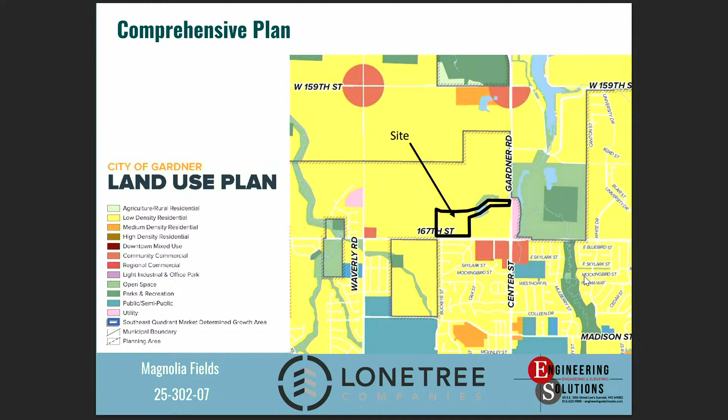The comp plan that you guys currently have is that area is a low-density residential area. But as we look at the zoning map in a second, you'll start to see some of the areas have started to develop in different ways.

So more of a hard commercial corner at the northwest corner of 167 and Gardner, RP3 to the south, RP2 to the southwest. Again, northeast of us is RP3. So it's beginning to develop in a little more of a not high density, but higher density than the low density I think the original comp plan had shown as we continue through that corridor in that area.

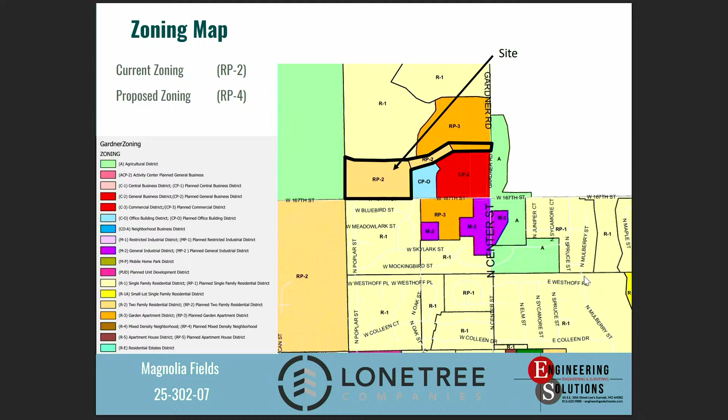So as we started to talk through the options of your code having duplex or duplex compact, and the zoning choices we made, we provided here straight out of your code the zoning districts you have that start to talk about the lot standards, the setbacks, and at the bottom you'll see how we fit and comply. We kind of fit in the middle ground.

So as a duplex standard is typically 5,000 square feet per unit or 10,000 square foot lots, our lots are averaging about 8,200 square feet. The duplex compact then is 6,000 square foot lots, so we're kind of in that mid ground of where it sits, or 3,000 per unit on that side.

The lot sizes then, the minimum lot width, we're going to sit to the standard of 70 foot, which is your duplex standard versus the duplex compact. And as you go on the building coverage, we're kind of in the middle. The front setbacks, the side setbacks, we're generally in compliance with the duplex on the side setbacks. And as far as building height goes, we'd stay in that same height standard that meets your duplex zoning code.

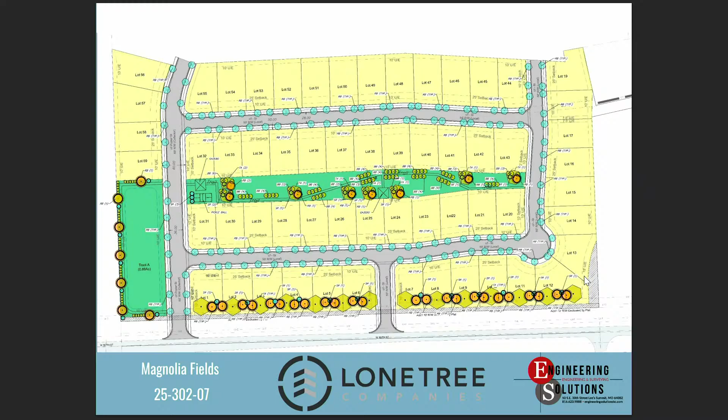There are a number of deviations that we're going through and asking for on the side of it. We'll go through each of these. So there's a lot of verbiage in there, and I think in the presentation or the submittal you guys have, you should have the list and the reasonings for it. If you go to the next page, it shows that breakdown of deviations.

So one of the deviations, deviation 1, is the driveway width. The driveway width in your code doesn't allow, or it's a tighter driveway width, I guess, than what might normally be standard.

As we started to look at what a duplex would want with a 2-car garage, 16 foot wide, a standard driveway that we could fit in there would be 20 feet wide, so we could park 2 cars on that side of it. Deviation 2 then starts to talk about the hardscape out in the front of it.

So again, the surface area as it relates to that, driveways are a little bit larger, but as you start to see, there's still a sufficient amount of green space out in the front of each one of these spaces, as well as the green space around the building.

Deviation 3 then starts to talk about the amount of garage doors that can be visible from the frontage side of it. So you'll again see that we've highlighted the 16-foot garage doors.

Deviation 4 then starts to talk about your code requires a sidewalk that would go from the building directly to the street. Our proposal is to have that sidewalk, or the porch exits, go onto the driveways so that we don't have additional hardscape out in front of the buildings.

Deviation 5 then starts to talk about that entryway, and as we're starting to show here, just giving an enhanced entry feature. As the plans continue to come forward, we'll continue to develop that. But as part of our request, we're providing additional architectural elements and pieces in there as part of that deviation.

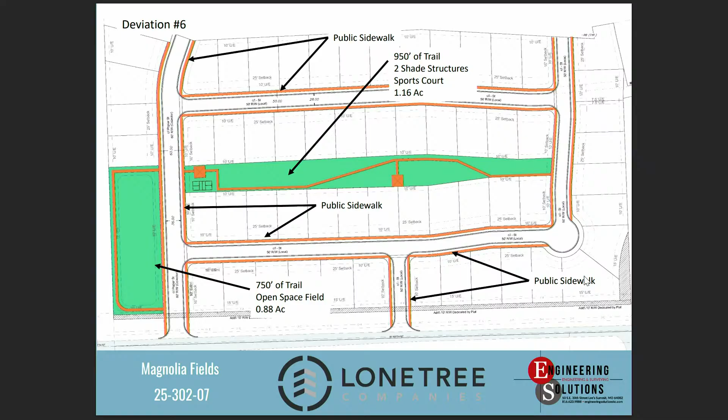With that, we're here for any questions you have.

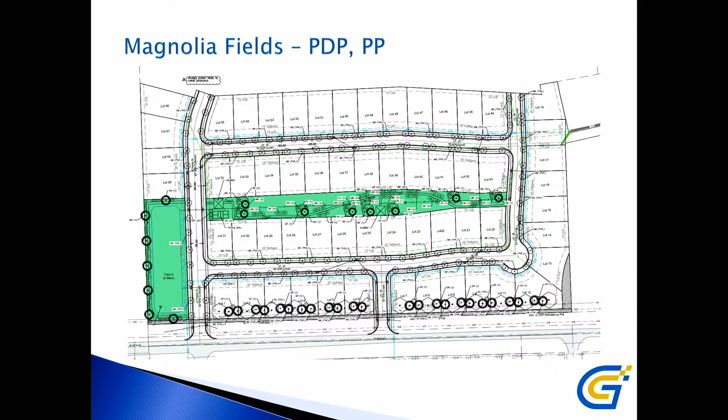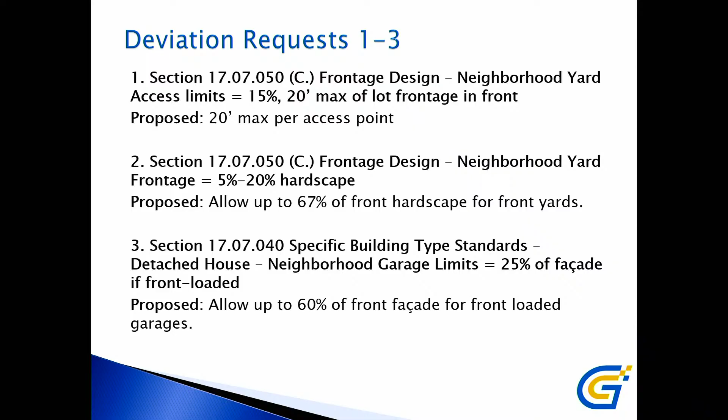The plans are in general compliance with the code, with the exception of the 6 requested deviations. I won't go over these in detail since Matt already mentioned them. Regarding the building deviations, typically we get those with the final, but the applicant requested them at the preliminary stage and provided justification for what they would be doing to the building permits and the features they would add. So staff is comfortable with granting them at this stage.

Staff finds that with the proposed conditions, the plan reflects generally accepted sound planning and design principles. It provides access for adjacent properties, does not deter any existing or future development on adjacent lots, and achieves the code intent to minimize the number of lots, and is consistent with various policies in the comprehensive plan to support future growth.

Staff recommends approval of this development, and there are 2 motions needed for this item. The first is for the rezoning and preliminary development plan. As a reminder, the Planning Commission makes a recommendation to the governing body for these 2. Staff recommends approval with 3 conditions: first, to ensure the site meets stormwater requirements; second, to ensure the existing sewer meets city requirements; and third, so the building elevations comply with the deviation requests.

The second motion is for the preliminary plat, which the Planning Commission is the decision-making body for. Staff recommends approval of that with 1 condition. I'm available for any questions.

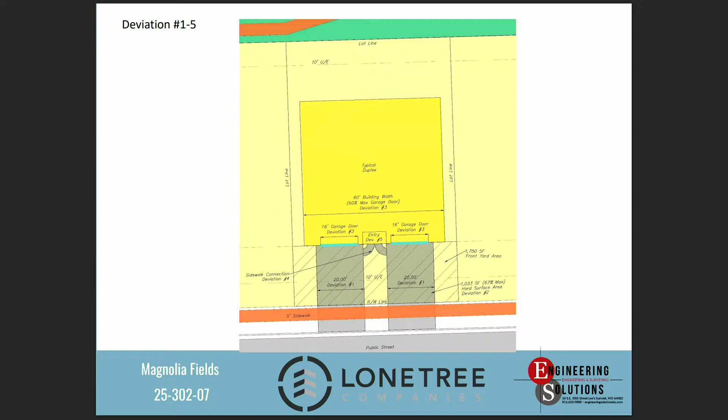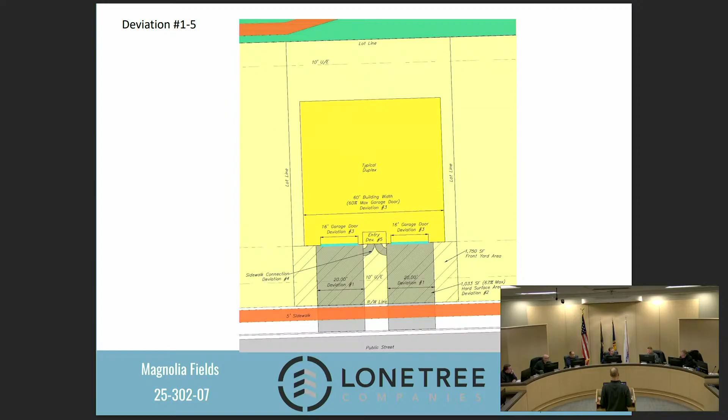No, I do have maybe just a point of clarification. So I saw the two entrances, very clear on that. The narrow corridor section, could you talk a little bit about what's going to happen with that?

Yeah, so to the neighbor's point, the access point will be off 167th only. There is a half right of way that appears it would have been a half right of way that goes east out to Gardner Road. Yes, our intention on the preliminary plat is we're creating a tract for that piece of ground. And to whomever purchases, develops, or does anything to the east and south or east and north, that ground would be available to sell to them or give to them, however it would be.

We have no intentions to do anything with that ground other than clean up whatever this odd shape was that got created. So just so I'm clear, eventually at the point of sale, that narrow corridor will be purchased, is what you're saying. And yeah, we're going to create it into a tract, so it becomes a pretty useless piece to us, and it could likely be useless to anybody else, but it only makes sense for whomever is developing south or north of there.

Right, so I don't want to give away the developer's position on it, but I think that there's not much value in it for them either. I think it'd be a preference to find whomever wants to develop and take that over, to do something with it more appropriately than keep a 12-foot sliver.

And so you just answered my other question. The final one is just, I know this is the third time, but it's not your intent to keep and maintain that. Obviously it is to sell it once. Right, the intent would be for it to go away. Okay, yeah, no other questions. Thanks.

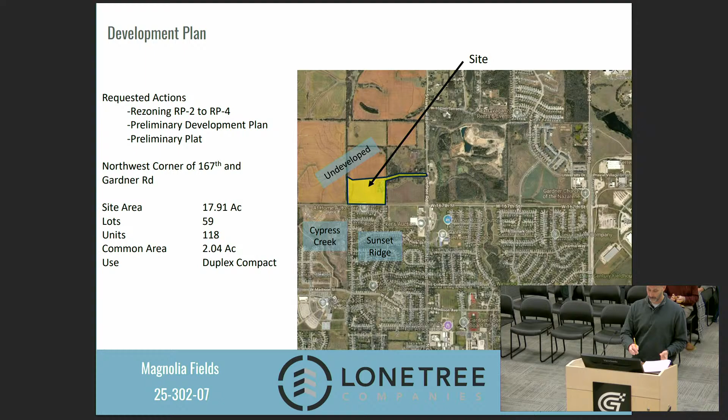I have no questions at this time. Can we go to the landscaping plan? I know that's typically like a final development thing, right? I've heard pickleball courts can be noisy in neighborhoods. I guess what kind of fencing or shrubbery, or do we need to look at adding? Did you look at that? So there's some lots that are pretty close there.

Yeah, so I think we are keeping the description. I know we call it pickleball court, and that likely could be it, or it could be a sports court that could be convertible into a couple different uses on that side of it. But yes, we are also hearing as time goes on that we'll continue to evaluate whether that's the right court type for that location. Some type of an activity court will be there, in our opinion.

But yeah, if the pickleball is there, the things we have used is they have some low netting that can go on the fences that will help keep some of the sound down. It won't end all of it. Additional landscaping on that residential side will help do some of it too. But yeah, we're going to evaluate the final decision on that one of what it'll be.

But something, yeah, I agree with you. We're hearing more and more as developments keep going on, everybody loves pickleball, but nobody wants it in their backyard for sure. Yeah, that's what my comments were going to be, I guess. Yes, for the final look, maybe some more landscaping there. Yeah, I appreciate that, along those lots there.

Another question I had was regarding the power. I guess two questions. First, the hatched area kind of along the south and southeast corner, is that the additional 10-foot of dedicated right-of-way? Yeah, correct. So the hatch on the south side is the additional 10-foot of right-of-way that we're providing to the city for the future redevelopment or development of 167th. And then on the east side, that kind of little shaped thing is the future access point that will go onto the property to the east whenever and however that ends up developing, giving an option there.

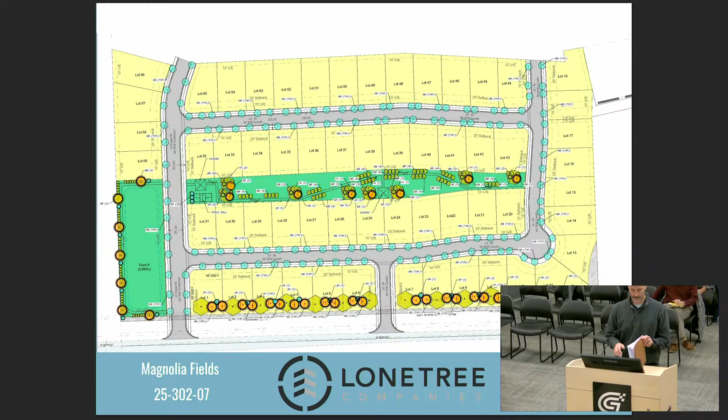Good to you. Yes. I have a staff question, and I'm sorry, I know we talk about this, it seems like every time.

Preliminary versus final plat - we approve both of those, not recommend, in terms of the motion we may make? That's correct, you approve both the preliminary and the final plats. The dedication of right-of-way and easements on final plat is accepted by council, so they're not acting on the plat itself, they're accepting the right-of-way and easements. All right, thank you.

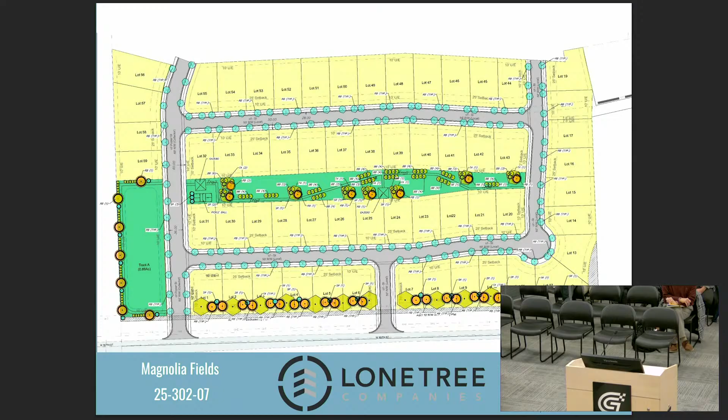Would you mind changing the slides to the suggested motion slides? Sounds like. I'll make a motion.

The Planning Commission recommends approval of the rezoning and associated preliminary development plan to rezone 17.9 acres from RP2 Plan 2-Family Residential District to RP4 Plan Mixed Density Residential District, with the deviations as outlined in the staff report, subject to the following conditions, items listed 1 through 3.

Second. We have a motion by Commissioner Combs and a second by Commissioner Berger. All those in favor? Aye. Opposed? Abstentions? Motion carries 7-0.

I'll make a motion for the preliminary plat. Planning Commission approves the preliminary plat, subject to the following condition, item number 1 as listed in the staff report. Second. Another motion by Commissioner Combs and second by Commissioner Berg.

All those in favor? Aye. Opposed? Abstentions? Motion carries 7-0.

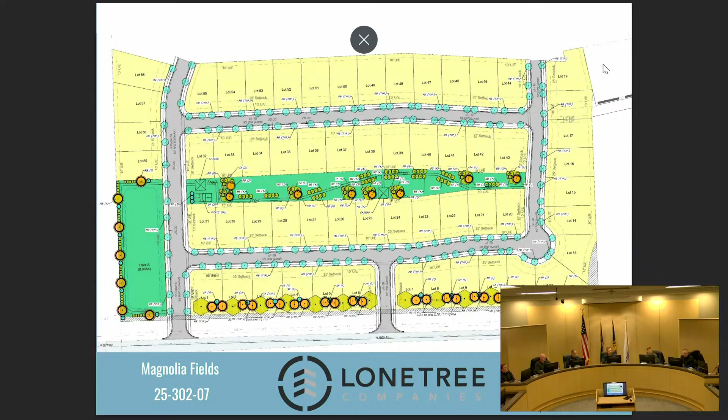This item will be considered by council, the rezoning preliminary development plan, February 16th. That's our next meeting, is the 16th. Thank you, Maggie.

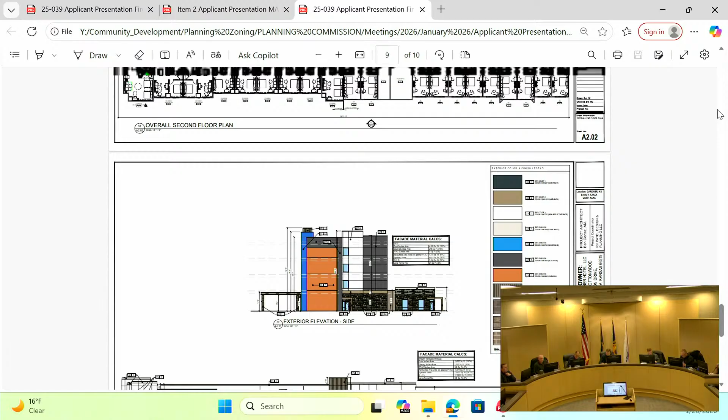Moving to regular agenda item number 3, New Trails North third plat, rezoning from C3 to CP3, preliminary development plan and final development plan, and this is also a public hearing item. Is the applicant present tonight?

Thank you, Chairman, members of the commission. Jeff Skidmore with Schlagel and Associates, 14920 West 107th Street, Lenexa, Kansas, here on behalf of the owner developers this evening and making the application for this next piece.

This is the New Trails Development Commercial Center at the southeast corner of 175th and I-35, essentially the exit ramps there. There's one piece already in place, the convenience store, the Phillips 66 store that's there and functioning now. We brought that to you a couple years ago and are pleased to bring this next piece - a 128 unit hotel, co-branded hotel unit on about a 3-acre tract of land, roughly centrally located within the development. It does not front on 175th Street.

It actually fronts on what is New Trails Circle, which is a private drive that was developed as part of the original infrastructure out there to establish the grounds and get things moving. The proposed hotel has access off of that New Trails Circle, one to the north and one somewhat to the southwest corner, near the intersection of New Trails Parkway and New Trails Circle. I'm trying to keep my street straight there - it's not always easy.

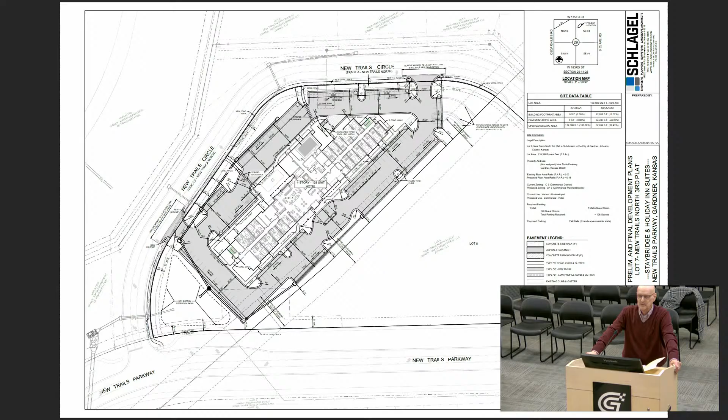We do have one small deviation we're requesting as part of this approval. The code requires 8 feet of space between the back of the curb and the building, typically wanting it to be concrete or a concrete sidewalk through there. What we're proposing is to put a 5-foot sidewalk at the back of the curb and then have 3 feet of landscaping between, so we're still providing the 8 feet required, while the landscaping hopefully softens the aesthetics up against the building and gives a little more presentation of our building from the parking lot itself.

Other than that, I just want to extend my thanks to staff. They've been great to work with to get us to this point. We greatly appreciate all their work and assistance they've provided for us. Other than that, I'd be happy to answer any questions. We are in agreement with the staff stipulations and the staff report, and happy to answer any questions anybody has.

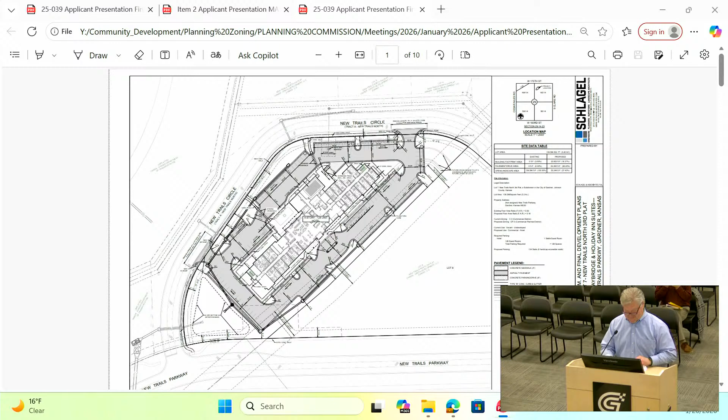Again, this is item 3, rezoning, preliminary and final development plan for a dual brand hotel. As the aerial depicts, the application before you today is for those 3 applications, specifically for the new 4-story, 128-room dual brand hotel. The property is approximately 3.2 acres and is part of the New Trails North commercial development. The hotel was part of the original rezoning plan that went before you and the council, adopted back in 2020.

To the north is vacant commercial ground and a convenience store. To the east and south is vacant commercial, adjacent to the Southern Star natural gas pipeline. This development will need an encroachment agreement for their south parking lot and possible cross access with the land to the south, which will be a condition of approval. And of course, to the west is I-35.

The dual brand hotel chains that make up these applications are Staybridge and Holiday Inn Suites. The proposed hotel totals approximately 23,000 square feet and will consist of 128 rooms. The landscape plan shows the minimum required landscape plant materials to be installed on the site per the land development code.

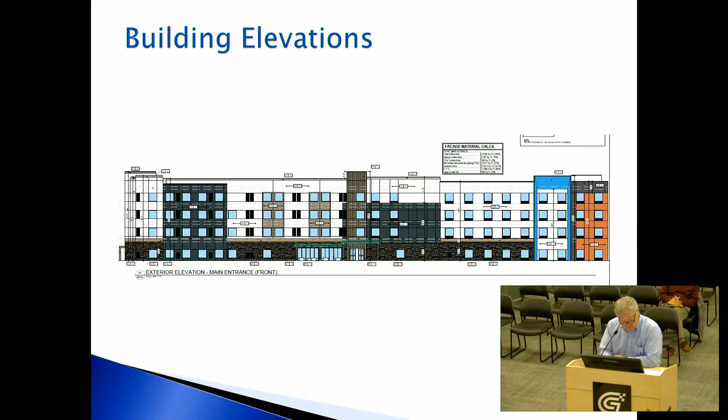As you can see from the elevations, the developer has broken up the long walls with offsets and different materials and colors. The main construction materials along all facades are color EIFS, stone, and brick.

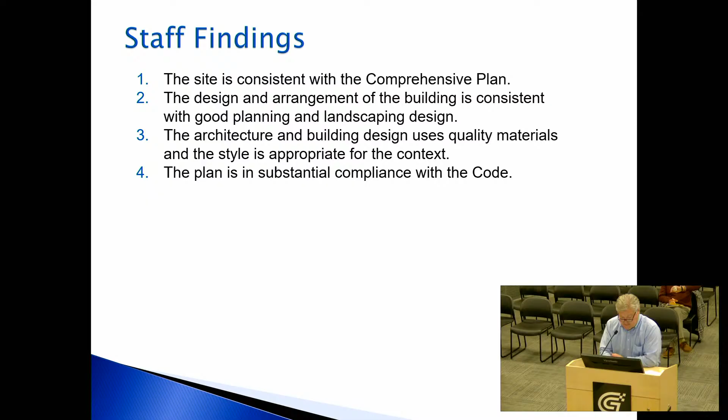Staff finds that this property is consistent with the character of the area, and the proposed plan is in line with other recent developments in the I-35 and 175th Street sub-area plan. The architecture and building design, along with the overall final development plan, are in substantial compliance with the code. As mentioned earlier, they do have one deviation request, which was described in great detail. That concludes the staff recommendation. If you guys have any questions, I'm available.

Wait till the public hearing, I think. Oh, yes. Had it and closed it already. Yeah, I know that was like 2 months ago. I remember there was a gentleman here. Let's see, yeah, he's not present tonight.

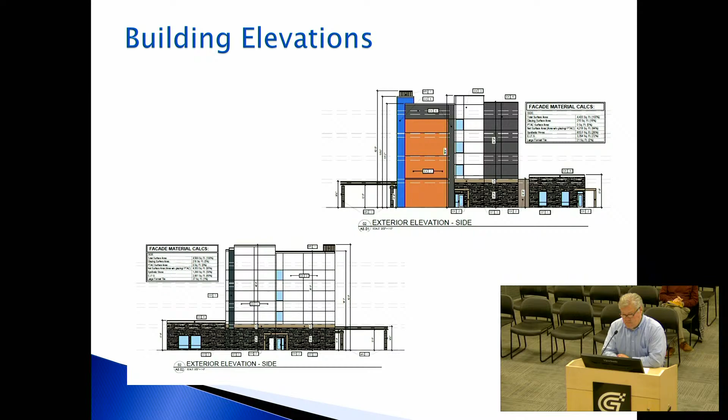Do you have any pictures, let's say if you're driving on 175th and you look to the side, I'm just wondering what you're going to see. You're going to see the hotel facing this way, because everybody complains about aesthetics—you're driving and then you see that hotel there. I'm just wondering, from your perspective driving on 175th, how you're going to see it, because you see this, but you can't tell how.

Let me go back to the aerial real quick. You'll be able to see more of it from the off-ramp and on-ramps to I-35, as you can see from the aerial. From 175th, you're going to see the side a little—you'll see that north side I was talking about earlier, but you also have to realize there will be probably 4 other commercial uses out in front of this that are closer to 175th Street than just the hotel.

We really worked on them quite a bit with the landscaping to, one, screen the parking, and two, screen the mechanics, to give a little bit more character from the public realm. So forgetting about the 4 lots in front there, you're not going to see it from 175th, but from the ramp you're going to see the hotel, and the entrance will look like this from here.

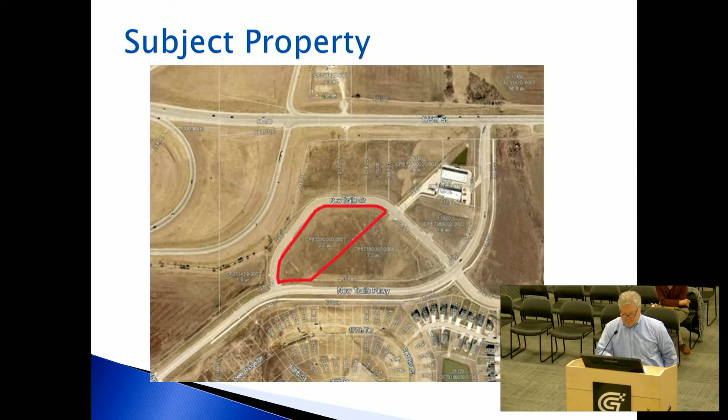Am I interpreting the design correctly? The entrance is on the east side, facing east, so it'll be kind of blocked from view. I think that'd be a good question for the applicant's engineer. Maybe he can speak to that.

That was one of my questions too. It seems backwards from what I've thought. That's why maybe I confused you, because I was curious how it's going to look. We were a little confused as well, but I think they're wanting that front view from New Trails Parkway, which is going to be a major road through both sides.

This may be a silly question, but just for confirmation on the landscape with the 5-foot sidewalk versus the 8. The 3-foot buffer we're talking about, that's in between the building and the sidewalk, correct? That is correct.

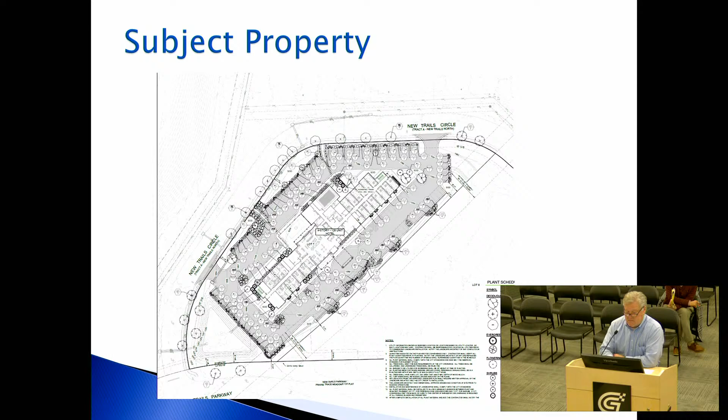Is that consistent around the whole building, or just the spot where the landscape is designated here up against the building, on that east side? They don't have any parking along the west side of the structure, but they still have the drive lanes, so it looks like a lot of the parking will be facing out towards the New Trails circle on the west side.

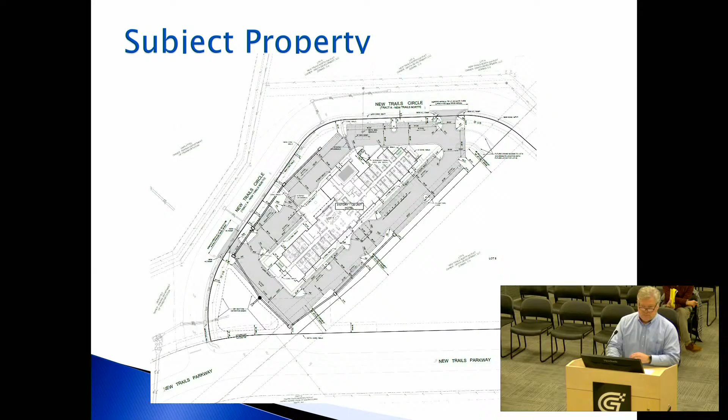Has staff or the applicant had any conversations with Southern Star about that encroachment agreement? It seems like putting in a storm sewer less than 10 feet away from the center easement might be a little concerning. We have had conversations with them. We've got a draft agreement in place. They typically want our final construction documents before they make that final agreement. We've worked with them before, with the convenience store as well.

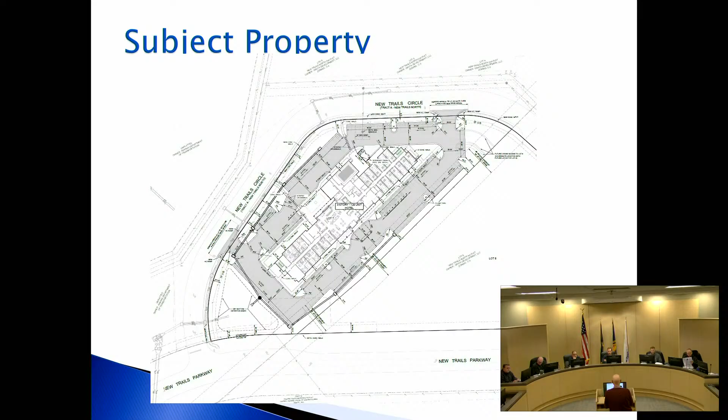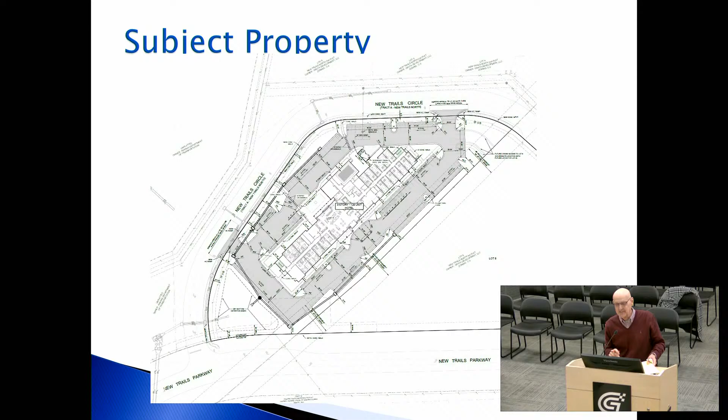So those are in place. And again, the finals will be part of our building permit package that we submit to the city as a condition of our permit approval. So yes, we have initiated those conversations with them. That makes sense.

Any other questions from the commission?

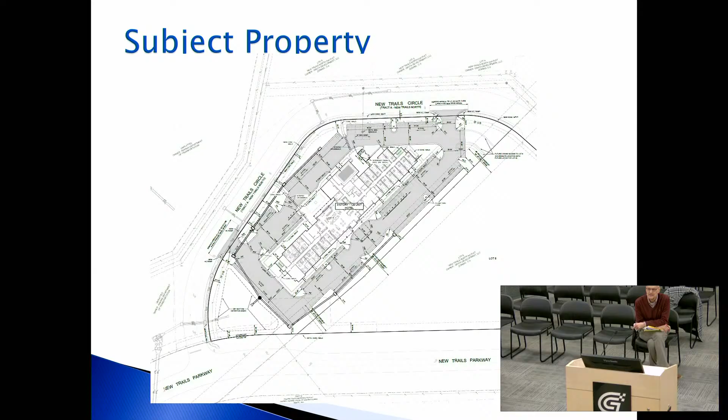Question for staff, we're looking at 2 motions again? Yes. And it's the same in terms of the preliminary development plan runs with the rezoning to the council, where you're making a recommendation, and the final development plan, where you're taking action.

I also want to note, you may have seen between the conditions from the November meeting and the conditions presented in the one-page report tonight, there was some slight modification related to the gas easement. It wasn't adding conditions, it was about when we need what based on the type of potential encroachment. I think that is an issue. Good?

Good. I'll make a motion. The Planning Commission recommends approval of the rezoning and associated preliminary development plan with the deviation as requested, to rezone 3.2 acres from C3 Heavy Commercial District to CP3 Planned Heavy Commercial District for a new dual brand hotel, subject to the following conditions.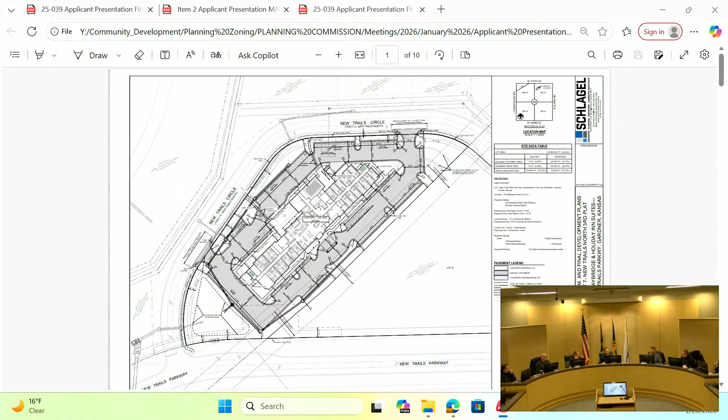Moving on, as you said, this item will go to City Council on February 16th for the rezoning portion. It also has to go to council, since it's within a mile of the airport. Yes, they would also have to take this to the airport commission or the county. That was one of the conditions.

Regular agenda item number 4, Warren Place Event Center. This is a revised final development plan. Is the applicant here for a presentation? Please state your name and address.

Good evening. My name is Rayleigh DeYoung, 16813 Stearns, Overland Park. I am the owner of Warren Place Venue and chair of the Gardner Downtown Committee. I appreciate the opportunity to be here. Thank you to the commissioners for your time this evening, and thank you to the staff for all of their assistance with this on the back end. I will briefly walk through the proposed pavilion for the East Lawn, and then I'm happy to answer any questions.

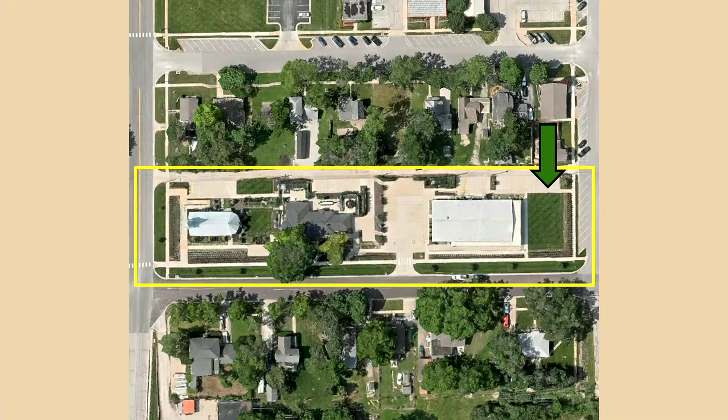Here is an overview of our property for orientation with the East Lawn highlighted. This is the site overview for the pavilion, as well as our landscape approach, including emerald green arborvitae, used to provide a soft privacy screen. This rendering illustrates the scale and character of the pavilion as proposed.

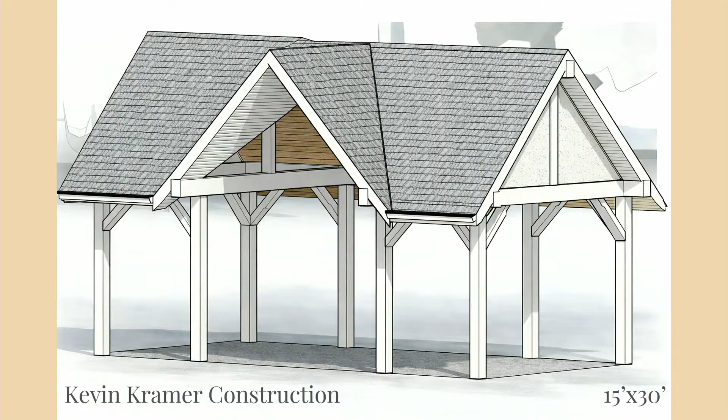I told you I would be brief, so I'll finish by highlighting a few context points from our leadership side. Landscape screening elements on the east lawn of the chapel were approved as part of our 2019 final development plan. Those approved elements inform the design approach proposed here. Since opening in 2020, we've seen client preference for ceremonies move toward the east lawn of the Warren, and the pavilion is simply a way to support that existing pattern with a permanent structure. This project supports our long-term stewardship of the property and reflects continued private investment in downtown Gardner. Construction is planned with a Gardner-based contractor, Kevin Kramer Construction.

I know much of this is already covered in the staff report and packet, so before I turn it over to them, I'll pause if anybody has any questions. Sure, thank you.

I'll be brief as well. This is item 4, a revised final development plan for Warren Place Event Center. Just like what Ray Lee showed, here's a copy of the aerial. The application before you today is a revised final development plan, specifically for an additional accessory building to be located on the Warren Place Event Center on the east side of the property. Warren Place Event Center was granted a final development plan back in 2019. The event center owner would like to add an additional outdoor structure for events, weddings, etc. along the east side. This slide shows the overall approved final development plan.

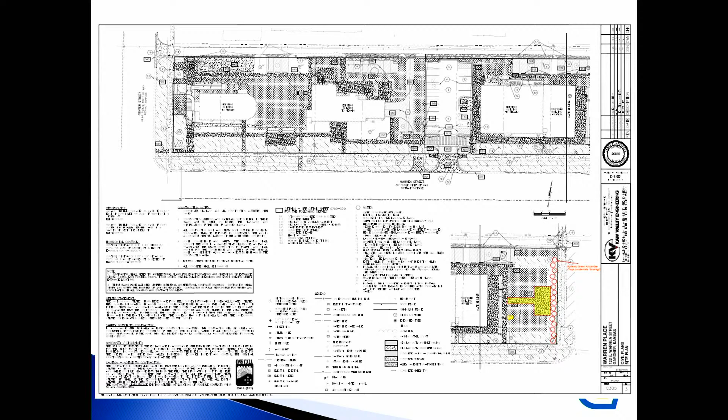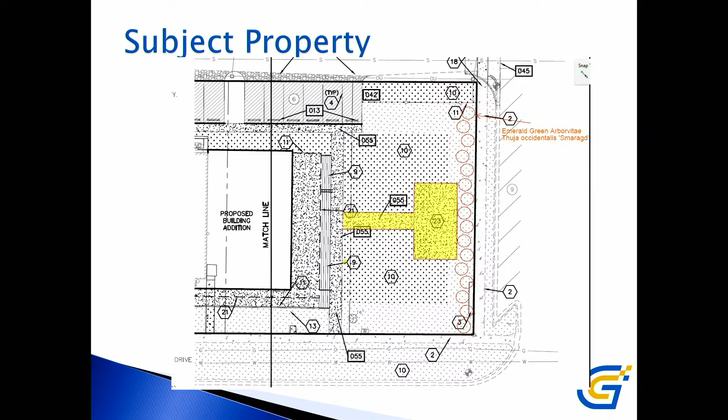The addition is shown in the bottom right-hand corner of this property, for an accessory building and gazebo. This slide shows a close-up of how the pad and sidewalk are to be constructed along that lawn area. They also added solid evergreen landscaping, and additional planting materials to help shield the gazebo from Elm Street and the adjacent parking along the street. This drawing shows the rectangular yellow shaded area, a 15-foot by 30-foot pad for the accessory structure, and a sidewalk leading to the main entrance of the easternmost building on the site. This is the overall elevation for that structure.

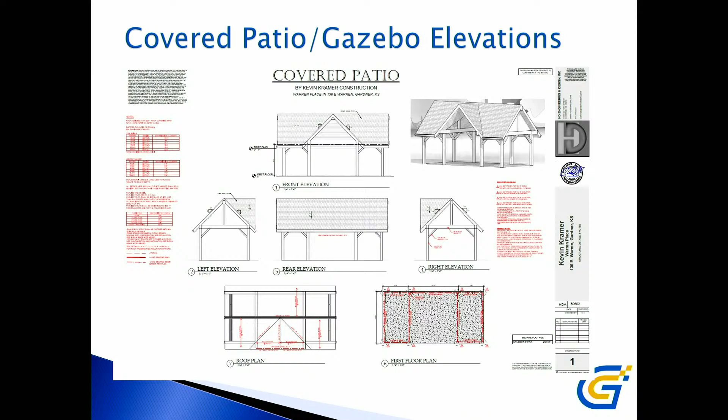Staff findings: the proposed gazebo complies with the standards for accessory buildings. The design and arrangement of the building is consistent with good planning and landscape design. The architecture and building design uses quality materials, and the style is appropriate for context. The plan is in substantial compliance with the code.

I have a question. Due to the size, and because this is an accessory building, is that why it comes through this process? So we had a little bit of debate on this one, and yes, it is partly the size, and also it was part of an approved development plan, which is why the decision was made to have them bring this in for a revised final development plan. Okay, well, thank you.

I've been to several events at your place, it's real nice. I just have a question as far as parking, because I guess we park over there. Where are you going to place the gazebo? What are you going to do with parking? Well, again, this gazebo is going on the lawn area, so that should not affect any parking at all, in or around the site.

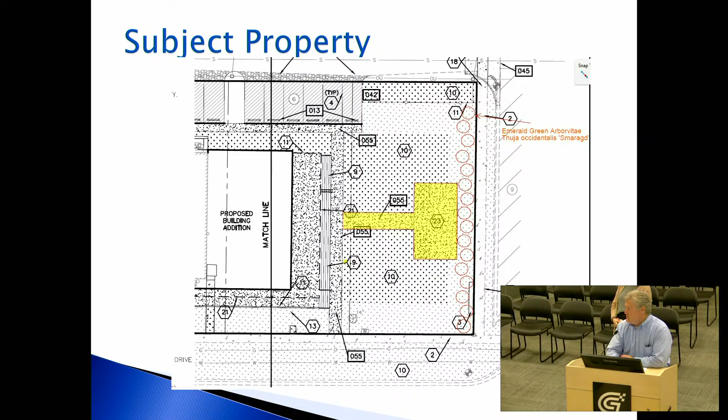This is my final question. In the rendering, it shows the existing building to remain, and the proposed building addition is listed here. Is that whole area the green space we're talking about, or why is that wording there? There's a match line. That proposed building addition is there, and when you look down to the picture below, you'll see that same match line. Does that help? Got it, okay, perfect, thank you. The drawing was too big for the page. Yes, okay, so this really narrow spot in the big picture is obviously the green space we're talking about. Okay, thank you for that clarity.

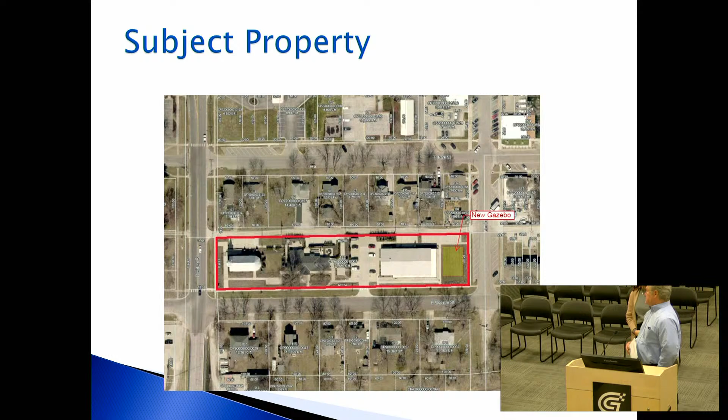Any more questions? I think I'm prepared to hear a motion on this. I'll make a motion. The Planning Commission recommends approval of the revised final development plan for the Warren Place Event Center gazebo.

It is approved. Oh, this is Planning Commission, yeah, it's an RO. Oh my gosh, so sorry, let's do this over. And there's no conditions. The Planning Commission approves the revised final development plan for the Warren Place Event Center gazebo.

Second. Motion by Commissioner Combs, second by Commissioner Berg. All those in favor? Aye. Opposed? Abstentions? Motion carries 7-0.

Okay, item number 5, Land Development Code Amendment. This is also a public hearing item. Full house. Yes.

We came to you in November with some proposed changes to chapters 1 through 3 of Title 17, and since then we've made a few more changes that I wanted to go through. I provided the staff report from November, so I didn't want to reiterate those recommendations, but to make the point, in Chapter 1 of Title 17, we were clarifying the options for zoning after property is annexed. There's a section in the nonconformities portion of the code that addresses nonconformities based on annexation.